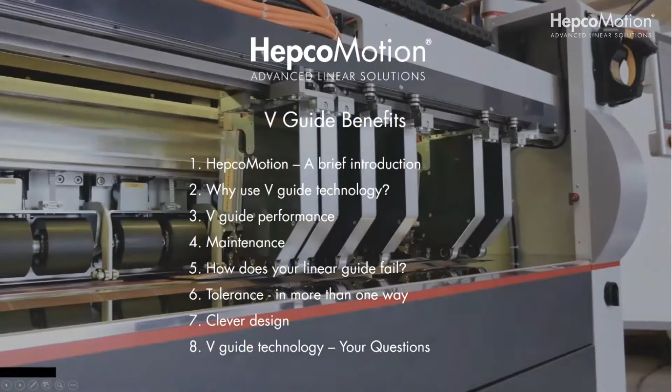Okay, so today we're going to look at firstly Hepco Motion, who we are, what we do, and where we are as well, importantly. And V-Guide technology, it's something you may be familiar with, maybe not. But so why use it? You know, what are the benefits in V-Guide technology and how will it help your business? And the features surrounding those benefits.

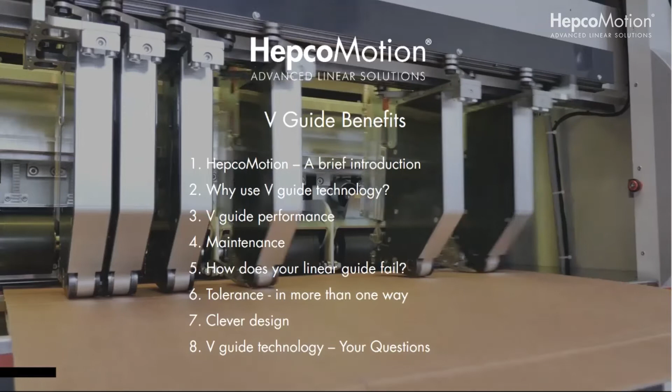So V-Guide performance, maintenance, and how does your linear guide fail? What's the failure mode? Tolerance, system tolerance, not just harsh conditions, but also the tolerance to installation. And then clever design, the design options, the flexibility that gives you with your concepts. And then finally, I'm going to open up the floor to your questions.

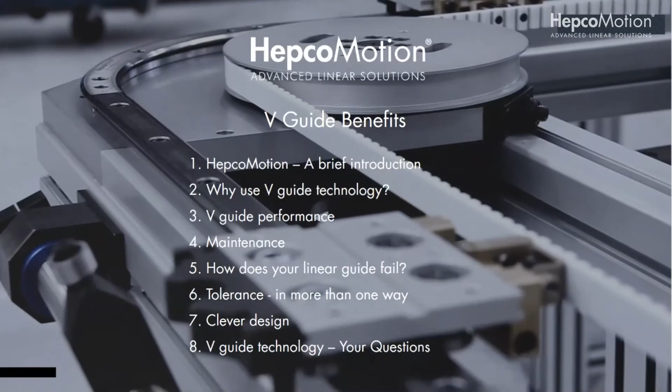So Hepco Motion, what do we do? So predominantly linear motion components. We're a European manufacturer of linear and circular slide systems. So our product range is extensive with over 45 mechanical motion products in our portfolio. And at the core of our range is V technology, which was pioneered by Hepco Motion over 50 years ago.

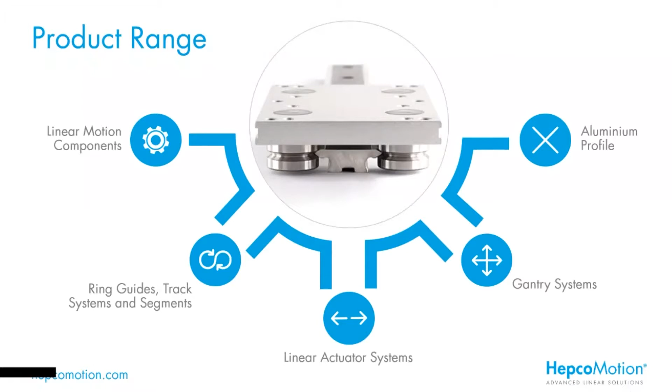We're continuously evolving our technology, and this has led to an ever greater demand for our products. Currently, we supply over 60,000 meters of track per year. Our sales and technical teams are supporting our customers with over 4,000 projects a year. So Hepco Motion is a family-owned and run company with 425 employees working for our customers all over the world. Our manufacturing plants are split over 4 sites, 3 in Europe, 1 in Asia.

Hepco Motion has 3 manufacturing sites in the UK. Tiverton in Devon is the location of our HQ and main manufacturing facility. Our bearing plant is situated in Braintree, Essex. And we also have Hepco Automation, a facility for providing our UK customers with complete turnkey solutions built around our range of motion products. So we have branch offices in the UK, Germany, France, Benelux and Spain, each with our own dedicated team of sales engineers providing direct application support to you and our customers.

In Asia, South Korea, we have another manufacturing facility supporting many of the technology-driven industries in this part of the world, so namely electronics, automotive, and EV manufacture, to name but a few. We also have dedicated teams of field sales engineers working from our offices in South Korea, China, and India. So as the demand for Hepco's industry-leading technology has grown across the globe, we've expanded our reach with trusted, respected partner companies, meaning that our products are available now in over 48 countries.

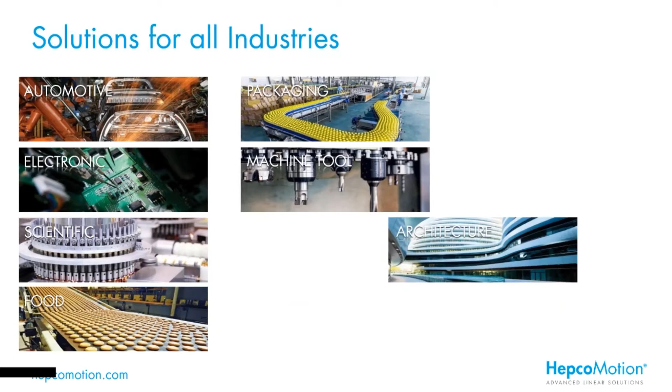So manufacturing, science and technology are core to virtually all industries. And where there is a need for motion, there's the opportunity for Hepco's products to provide solutions. Probably easier to tell you the industries we're not involved in rather than those we are. But a few key examples of where our products are used include packaging, food production, electronics, and pharmaceutical.

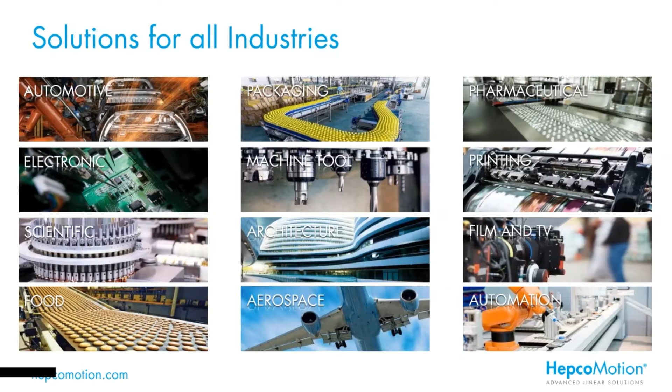So why will Hepco's V-Guide technology save you time and money? After all, that's the big hook, the big question. And of course, we recognize there are other technologies out there, some that even look very similar. So I'm going to run through the strengths of our V-Guide technology and the quality that really sets us apart.

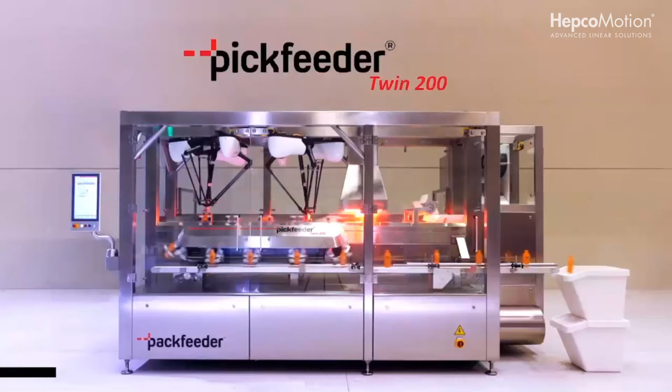So we're going to consider 3 key benefits that surround our V-Guide technology. And the first one we're going to look at is productivity. How will a V system improve your throughput? So we're going to focus on three main features, the first of which is speed. So speed, clearly, it's fundamental to throughput. Goes without saying, the faster you can get your product through a line, the more product you're going to produce.

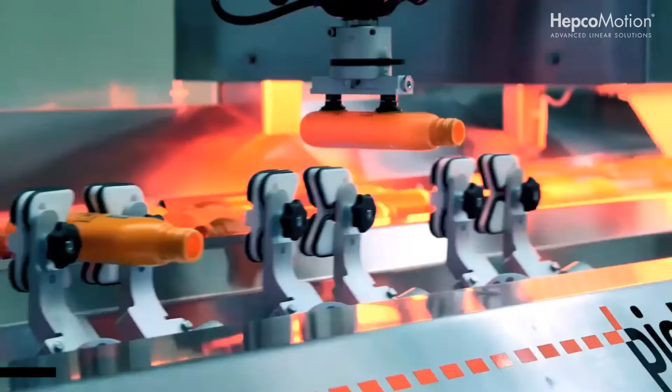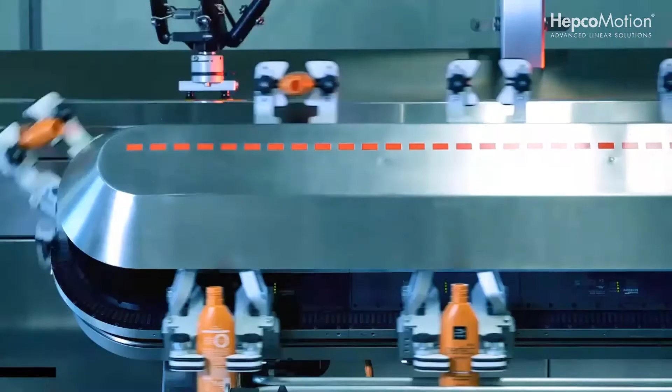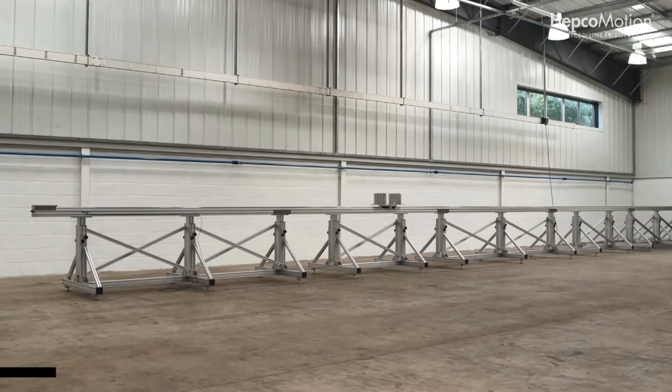So what are we talking about in raw numbers? Well, a V system is capable of speeds in excess of 10 meters per second, or in other terms, 36 kilometers per hour. So it's not hanging around. So combined with acceleration figures of 3 to 4 Gs, we're looking at a very dynamic system capable of exceeding alternative technologies.

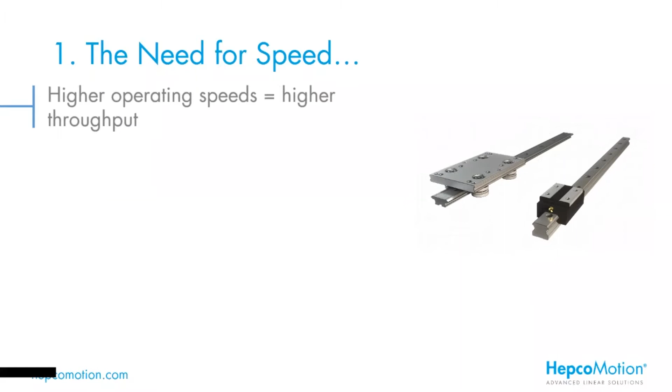So higher speeds clearly equals a higher throughput, which means increased productivity. A V-Guide system is capable of around 10 meters per second. Recirculating technology, such as ball rails or ball bushings, are typically limited to 3 or 4 meters per second.

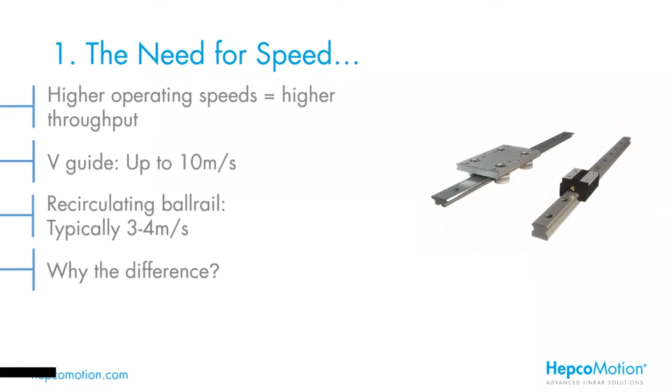And why is there this big difference? Okay, so it's all going to get a bit sciencey now, but please bear with me. This is fundamentally down to Newton's second law of motion: force equals mass times acceleration. So recirculating bearing designs experience a high degree of acceleration change between the load bearing track and the return track, as it goes around that loop to return.

Ultimately, this causes very high forces to be applied to the end caps of the bearing, which are responsible for guiding the balls into that return track. So the combination of the high force and end cap material really limits the rate at which the bearing block or bush can travel. Conversely, a V bearing system has a uniform acceleration due to its circular design. The balls are captivated between highly durable, hardened steel inner and outer raceways.

To put it in relatable terms, think about driving your car around a sharp hairpin bend as opposed to a long sweeping bend. Think of the forces you experience in both those scenarios. That's much the same as what's happening to the balls within the innards of those bearings.

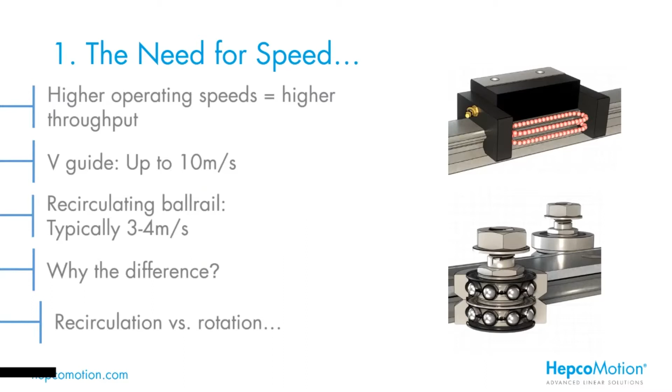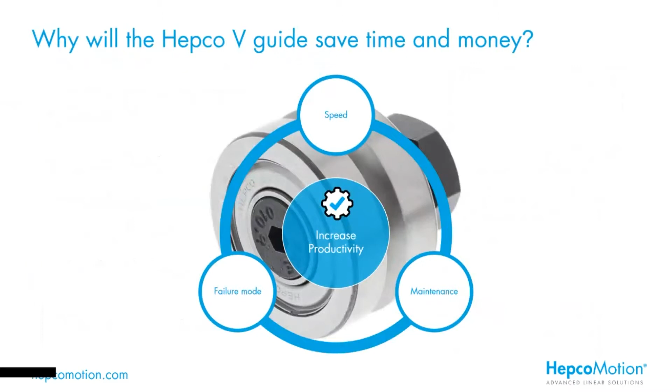So looking back at our key benefit of increased productivity, we can see that speed is fundamental to achieving this, and V technology really offers a significant advantage in this area. Indeed, we're seeing our products used extensively with linear motors for exactly this reason. And the next feature we're going to look at surrounding productivity is maintenance.

One of the key features of Hepco's V-Guide linear system is the facility to adjust the eccentric bearings. This means that after many thousands of kilometers of travel, when a small amount of play develops in the slide system, it can effectively be reset back to its original factory preload. This is a feature that's not possible with alternative recirculating technology. If you get play in a ball rail system, then effectively that has to be taken out and thrown away. So the key message: readjust, don't throw away.

The eccentric journals give that carriage adjustment, and typically you may be able to readjust that system 2, 3, or even 4 times during its overall system life. The recirculating linear guides require a complete replacement. You can't just change the block when a bit of play comes in, because invariably the wear has occurred to both the internal runners on the block and the running raceways on the rail as well. There's no means of adjustment.

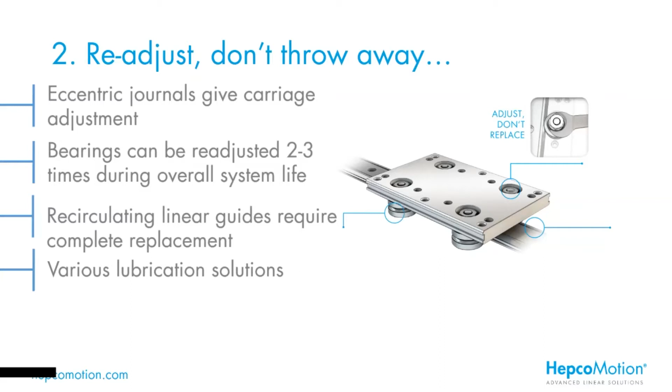The Hepco V system incorporates various lubrication solutions. We've got cap seals which fit over the bearings and allow the bearing to be charged with grease, giving you about 1,000 kilometers of running before you touch it again, and lubricator devices which run directly on the slides. But if you want a really fit and forget solution, we can offer a bleed lubrication option, which ports directly into the slide and can be piped up to an automated dosing system. So really you never have to touch it.

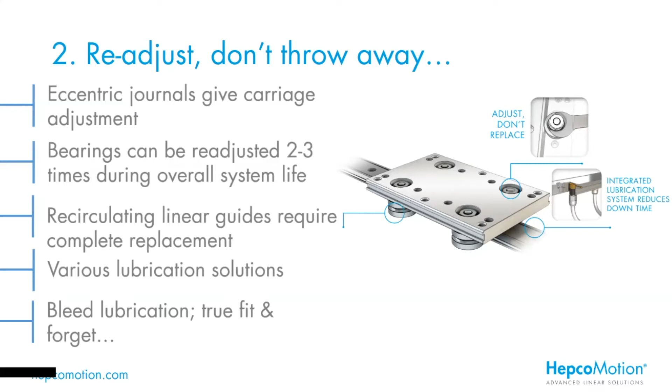So V-Guide maintenance means that the system can be adjusted as opposed to complete replacement. And undoubtedly the adjustment process takes far less time, meaning the machine is operational for a higher percentage of time, which ultimately means higher productivity. Moving further down the line and looking at end-of-life scenarios, you've got to consider the failure mode and how it is going to affect your productivity.

I think you'll all agree that the worst case scenario is where everything literally comes to a grinding halt, possibly with some quite spectacular effects. So what is catastrophic failure? It's a sudden and total failure that's irrecoverable. Sounds pretty bad. What effect does this have on your production line? Ask yourself that question.

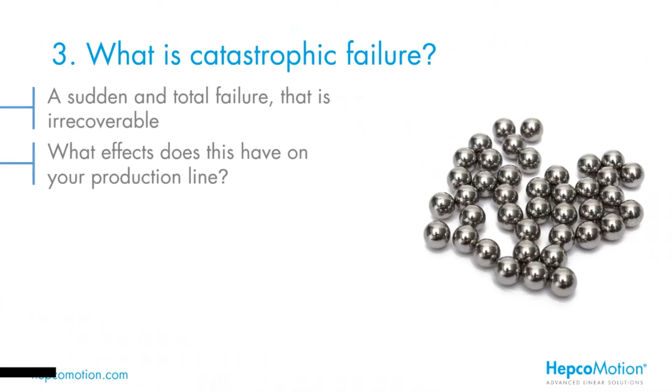So why does recirculating technology have this limitation? Well, as we looked at with speed, the balls are running around inside the end cap. The end cap material is generally a plastic type of material, and as the system comes to its end of life, all of the stress that's gone through that end cap causes wear and ultimately failure of this end cap, resulting either in the balls pushing through the end cap or the end cap coming away completely.

Once that end cap is gone, there's nothing to retain those balls. So the balls come out the end of the block, and invariably you've got metal on the rail, and it literally will not move. Once those balls have gone, there's no bearing technology going on anymore.

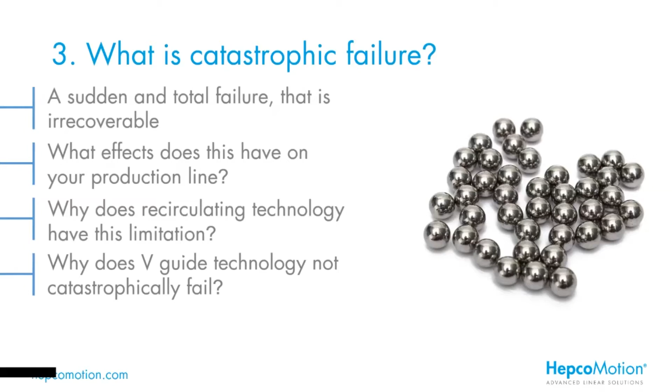So, conversely, why doesn't the V-guide technology fail in the same way? So we've looked at the construction of the V-bearing, and we've mentioned the fact that the balls are captivated between those hardened raceways, an inner and an outer raceway. The bearing is sealed for life, okay? This isn't the running surface.

So when some wear builds into the system, you will get a bit of play in the bearing. It'll be noticeable. The carriage will start to move and you can feel it on the bearing, and quite often you'll get noise as well. So you've got a warning, and this is a gradual process. It happens over a long period of time. So you don't get that sudden going from working to not working. You've got a really long period where this wear is taking place. So it's very much a gentler process.

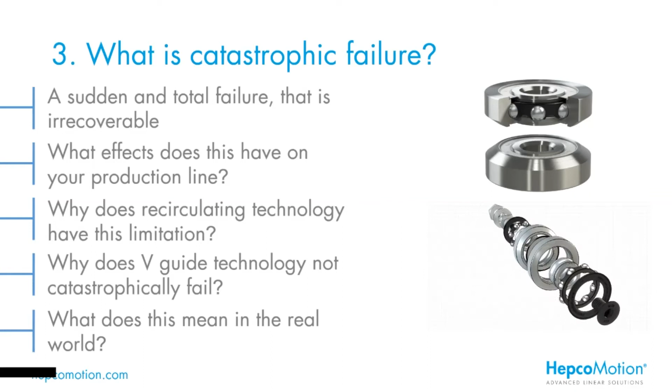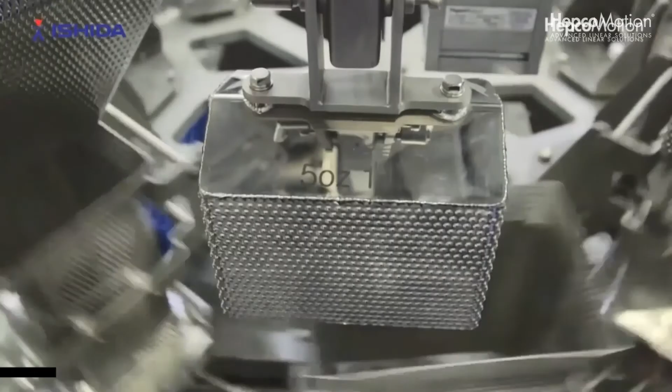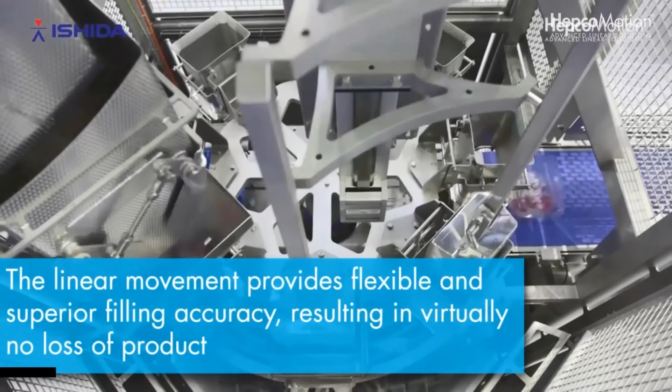And we've got to consider, what does this mean in the real world? So let's take this application for an example. It's a food packaging process, and for this particular application, it's using a DLS4, which is using a V-guide system. But say it was using a recirculating ball rail. So it completes a stroke of 300 millimeters in 1/4 of a second. This is operating 16 hours a day, 7 days a week. So the output is one product every 1.2 seconds, which equals 3,000 parts an hour.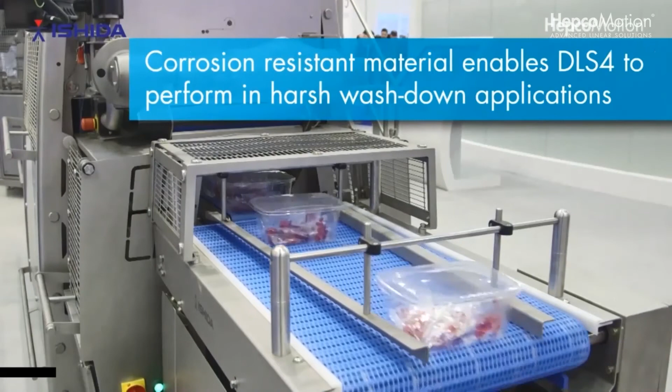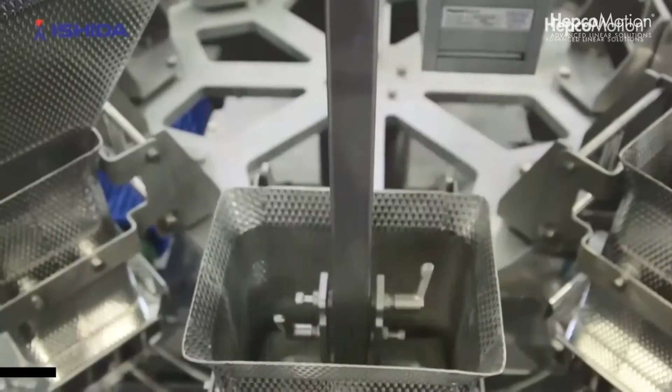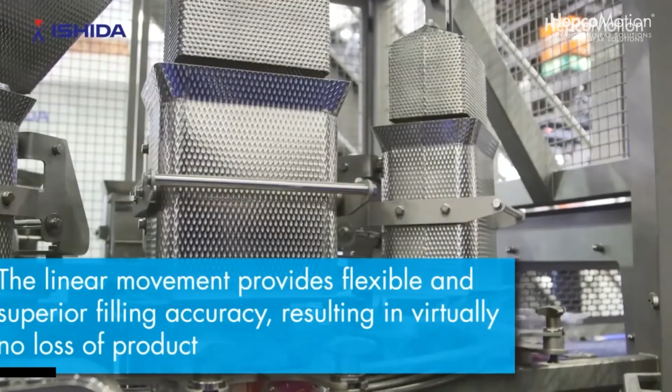And in this particular application, the customer is using a Hepco V-Guide system. So it really allows them to run quite literally millions of cycles with the confidence that this system will not catastrophically fail. They'll get those warnings. They might get a bit of play in the system, or it might get a bit noisy. But ultimately, it's not going to suddenly grind to a halt with a sudden bang.

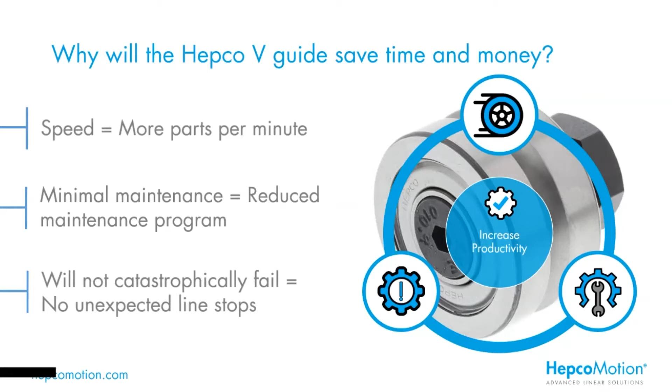So to summarize the features around the key benefit of productivity, speed clearly means more parts per minute. The minimal maintenance means a reduced maintenance program. It means your machine is running for longer, therefore it's outputting more product. The fact that it will not catastrophically fail means you've got no unexpected surprises. And you don't have to build in as frequent planned preventative maintenance. Again, this means the machine is running for longer and it's producing more.

Okay, so now that we've looked at the key features of increased productivity, we're going to look at the next significant benefit, which is the cost saving that a V-Guide solution can bring to an application. So we've already touched on maintenance, and of course this feature has a crossover to the cost it can save during the life cycle of the machine. The adjustability of the eccentric bearings allows for repeated resetting as opposed to a replacement. Being able to adjust means that money is saved not only on the material cost of the components, but also the cost associated with downtime and maintenance hours.

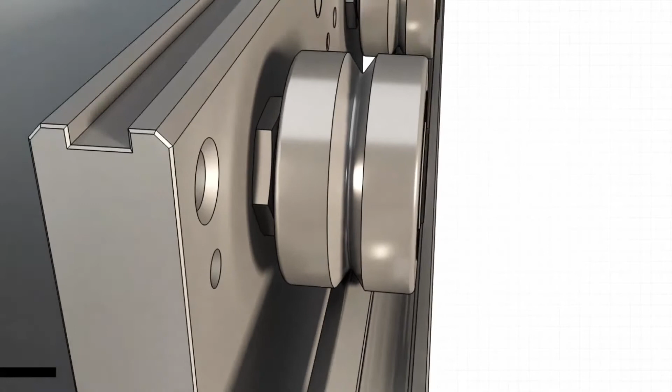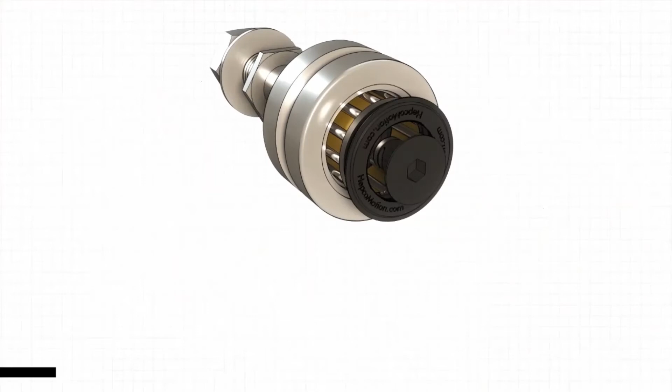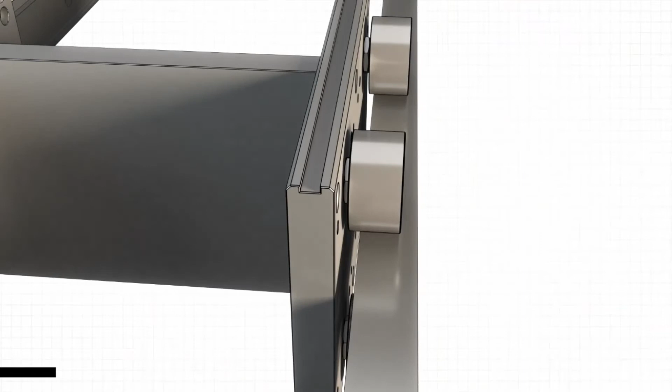And significantly, another feature that saves money is the ease of installation. A V system, by its very nature, is very tolerant. The bearings have a small axial float within them, and it allows for V systems to be mounted in parallel. And because you've got this small amount of tolerance, it won't bind and fight against each other and cause additional load. But beyond this, we've got additional options which allow for greater tolerances, including floating bearings and flat tracks. This does not require machining mounting surfaces. So these options really allow for installation even with welded fabrication tolerances, which, as we all appreciate, are quite wide.

So the compliance is integral to the design. If you're running on a slightly imperfect surface, the 4 points of contact of the 4 bearings will allow for slight misdemeanors in your mounting surface. Pretty much most surfaces are okay for a V-Guide system. So you could take a length of steel box section, for instance. And you don't need to specially prepare the surface. You don't need to machine it flat because there's enough tolerance within the bearing system.

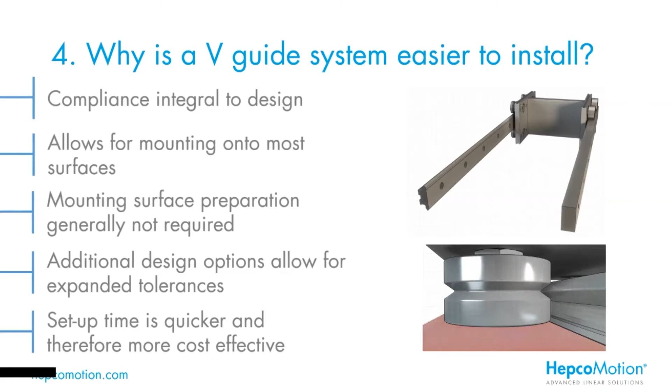The additional design options really allow for expanded tolerances. And ultimately, this means that your setup time is quicker and therefore more cost effective. So with built-in compliance and options that extend this capability further, time and therefore money is saved, not only on the installation, but also design. And it's so easy to overlook design costs, but literally why spend money on reinventing the wheel?

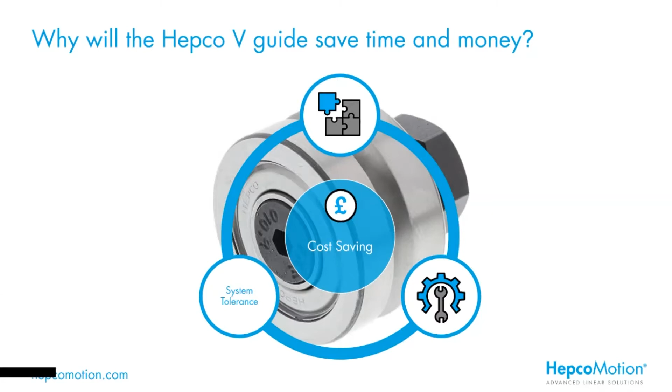So moving on to system tolerance. And we really do love a challenge. And this is one area where the V system excels above all other technologies. Sure, we can do nice and easy, clean and dry environments. But when the going gets tough, the V system really steps up. Throw what you will at a V system: dust, swarf, wash down operations, even glass. There really is no better solution for keeping things moving in challenging environments.

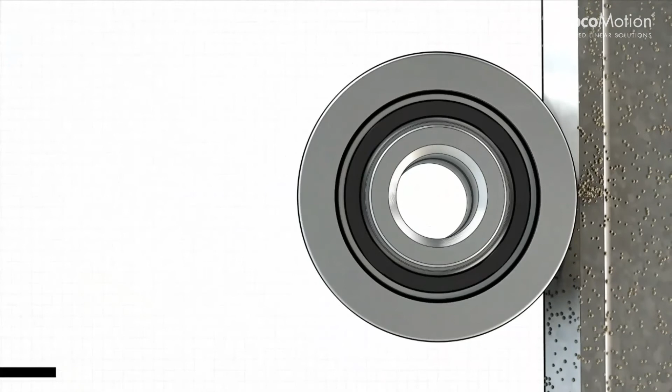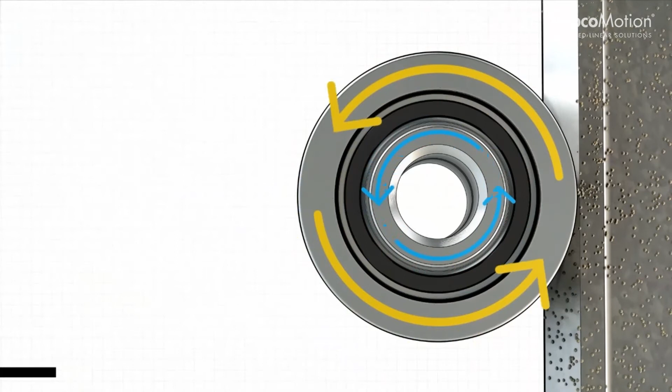Another inherent feature in V-Guide systems is its self-cleaning ability. The difference in diameter between the inner and outer of the V profile in the bearing results in a peripheral speed that increases as you go towards the outer edge of the V. The effect of this speed differential pushes the dirt and dust to the outside edge of the bearing, effectively wiping the flanks of the V clean as the bearing passes over the slide.

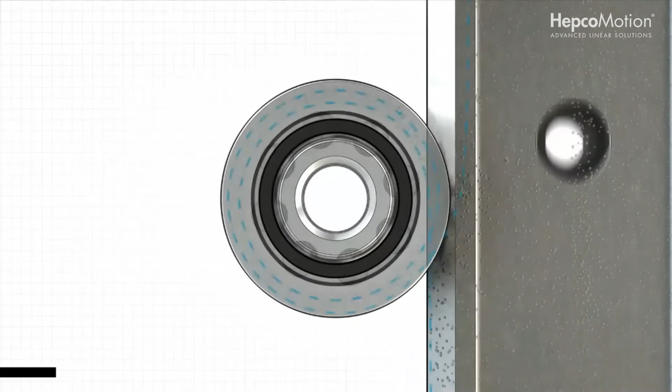Put in another example, think about sitting in your car in a hailstorm. You've got your windscreen wipers going, and it will push those hailstones towards the outer edge of the wiper, where you've got a greater amount of speed. Much the same sort of manner or principle. I may have used a bit of artistic license there, but you get my drift.

So let's look at a real life application. This one is using Hepco's GV3 V system for linear guidance of the reed on a carpet weaving machine. And clearly this is a dirty environment with plenty of dust and flock in the atmosphere. In this instance, the V bearings are housed in cap seal devices, which provide lubrication to the system and also aid with the wiping function. As a result, this particular application has been operating for over 10 years without a single breakdown of the linear guide system. Pretty impressive.

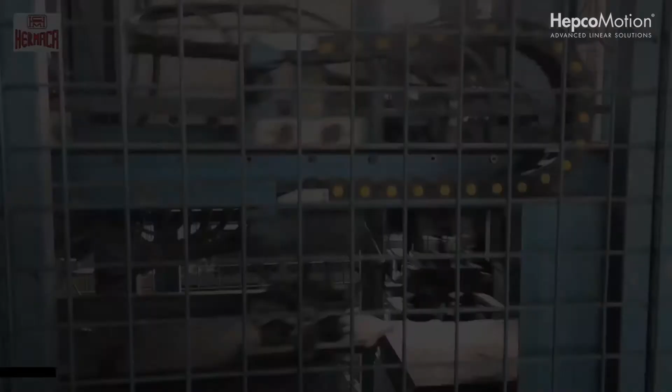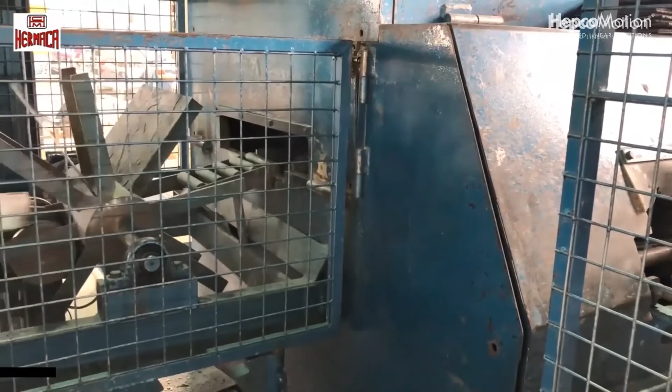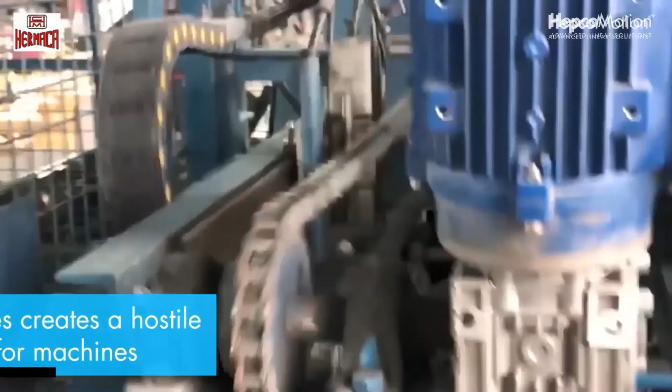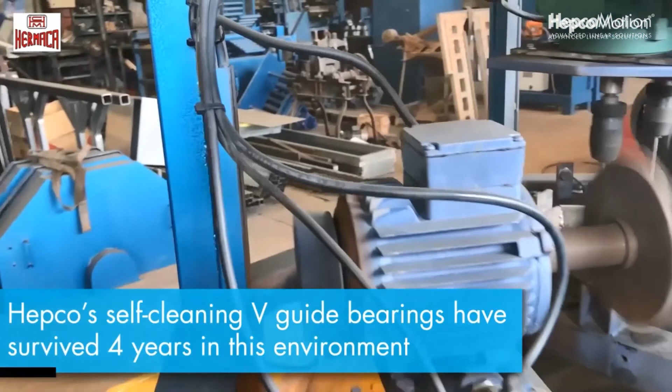So we've established a bit of fluff is no problem, but let's step things up a bit. How about slate processing? Now, the cutting and grinding of slate is probably as harsh as it gets. It's a fine abrasive dust that literally gets everywhere. And indeed, this system was originally designed with recirculating linear guides. However, due to the aggressive environment, these guides were only lasting about 4 months before they needed changing. The system was refitted with Hepco's GV3 V guide systems, and it now gives over 4 years of life in what is clearly a very challenging environment.

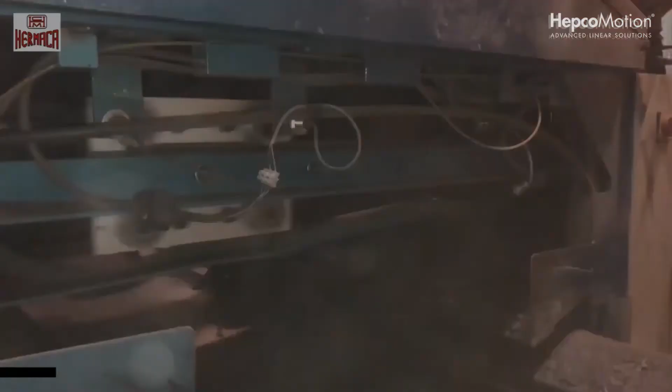So in this instance, the application runs without lubrication on the slides, and this prevents the abrasive dust mixing with the grease to form a damaging grinding paste. And again, this is really a key differentiator. In the right application, dry running is possible. However, we do strongly recommend that you check your application with our technical team first.

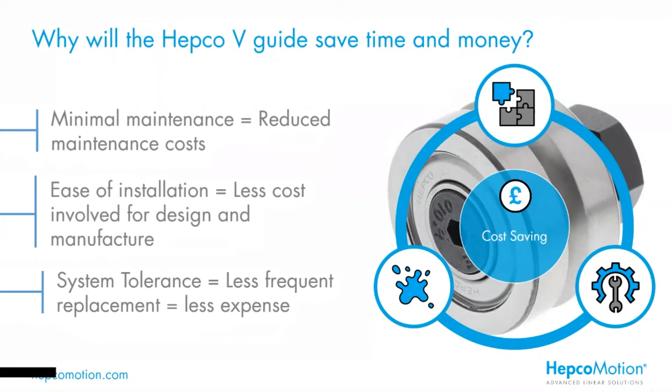So, looking at the key benefit of cost saving, minimal maintenance means reduced maintenance costs. The ease of installation equals less cost involved for design and manufacture and installation, of course. And the system tolerance to harsh conditions means that you've got less frequent replacement and therefore less expense.

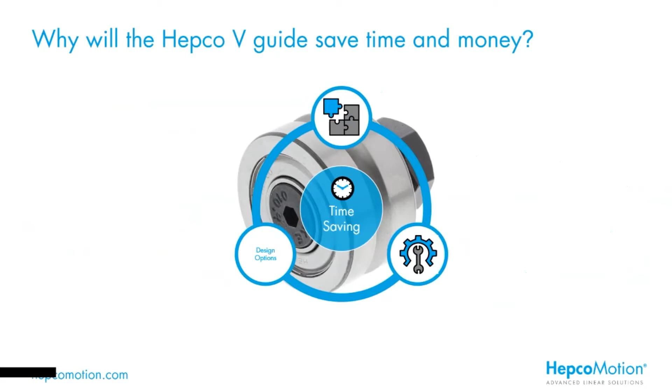So cost saving, time saving, they're understandably benefits that really go hand in hand in many cases and share some common features. Reduced maintenance equals less time spent by your engineers on preventative or corrective maintenance. The ease of installation clearly saves time for both the design and the assembly processes. But additionally, the design options available can provide significant time savings. So we'll look at those next.

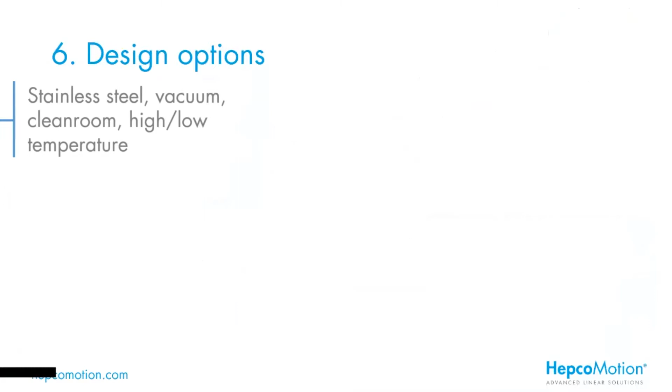The core V-Guide principle runs through many of our products and provides guidance for applications ranging from shuttling microchips into vacuum chambers to the pick and place of heavy racks of bread. So if you've got a specific application that is based around product handling, assembly, processing, pretty much any sort of motion, there will invariably be a V-Guide system that will suit your needs. And our strength as a manufacturer allows us to adapt to the needs of our customers, and we've developed many innovative solutions to solve our customers' problems.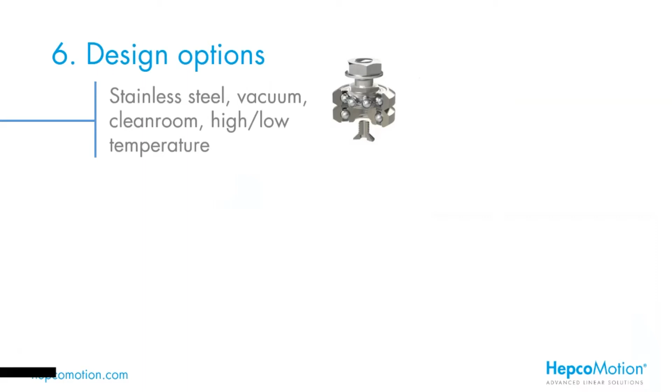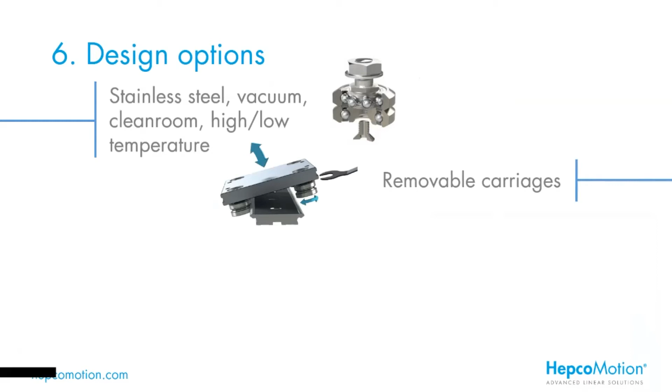For instance, special all stainless steel bearings suited to clean room and extreme temperature applications. Removable carriages that allow vertical removal from the slide as opposed to having to run it off the end. This is fundamentally important if you have linear guides that are running between machine bulkheads. It can save you all the time of removing the end of a machine to do your maintenance. We've got integral rack drives mounted to V-slides, taking away the need to design, install and align relative to the guide system.

And of course, our ring and track combinations offer unparalleled flexibility in machine design. Why reciprocate when maybe you can go in a continuous motion using one of Hepco's many designs of driven and undriven track systems?

So another key benefit of being a world-class manufacturer is that we're able to offer extensive customization to our products. Customized carriage plates to suit your tooling requirements, special surface finishes, non-standard mounting holes, non-catalog ring diameters, and so on. We get asked for different things all the time, but it can really save you time in your design and installation.

But additionally, we can also offer bespoke mechanical system designs. So much of the legwork is taken out of realizing your concepts, so we can put together multiple parts of our product range together as a full mechanical system.

So we've looked at the fact that design flexibility really can save you time during your machine concept and design to minimize the additional drive elements or simply reduce the time needed to access critical components for maintenance or line changes.

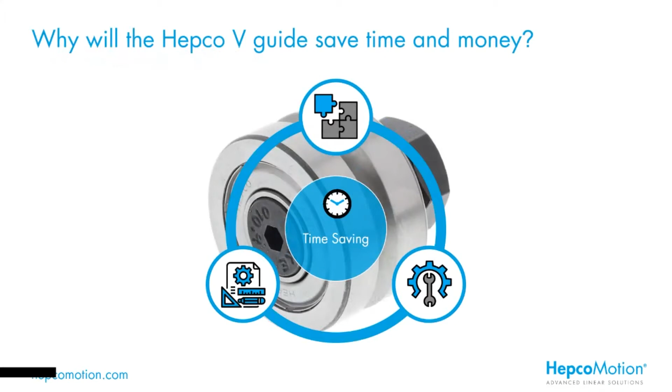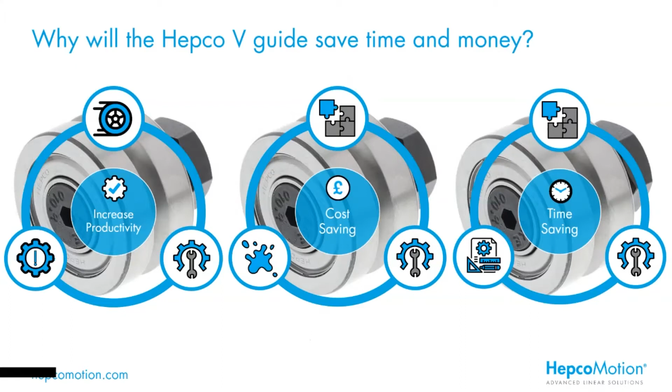So there we have it. 3 key reasons why Hepco's V system can benefit your business by increasing productivity, reducing cost and saving time. But of course, this is really only scratching the surface.

As I've already touched on, Hepco's range is extensive, offering solutions for applications carrying only a few kilograms up to hundreds of kilograms. So looking at the products themselves, GV3 is our core product, offering many different slide specifications and numerous design options from manual locking devices to integral racks. Simple Select is a complementary range providing the quickest ship time of any of our products.

SL2 provides a stainless steel linear V-guide solution suited to applications such as food, pharmaceutical and electronics manufacture. Bishop Wisecarver DualVee and UtiliTrak products offer further design options based around single edge V and channel based technology. Or for high payload applications, Hepco's HDS2 can be assembled, for instance, into multi-axis gantry systems. And we have a varied range of modular driven systems with options on driving methods such as belt or screw.

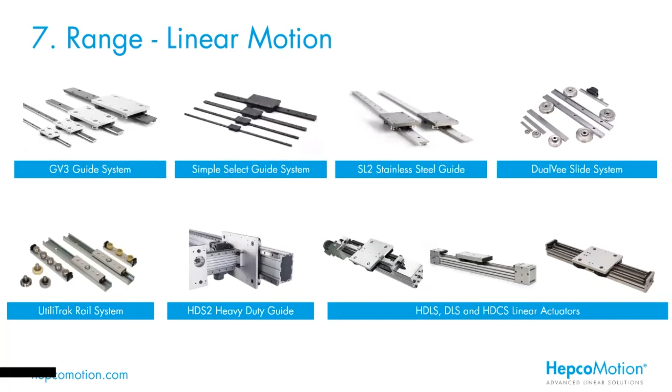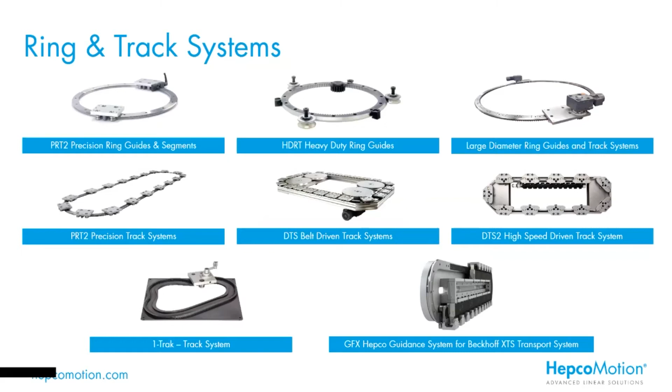And V systems, of course, aren't restricted to just straight lines. Our ring and track systems offer a huge array of options on slides, bearing sizes, and ring diameters. Hepco's patented 1-Trak design has proven its ultimate flexibility, not least in contributing to the cutting-edge GFX track system, an innovative track system that really enhances the mechanical capabilities of Beckhoff's XTS system. Again, we're really only scratching the surface of our ring and track solutions, and we will save this for a future webinar.

So half an hour is really not much time, and we've really only just touched on the potential of the V-guide systems. But here are a few more key points that you may want to consider Hepco's V technology for. So the V-guide design can allow for 6-wheel carriages that can traverse gaps. 100 millimeters of free air is quite feasible, and with at least 4 bearings in contact with the slide, there's no loss of stability. You've always got that preload. Equally, it's very easy to butt tracks together for theoretically limitless lengths.

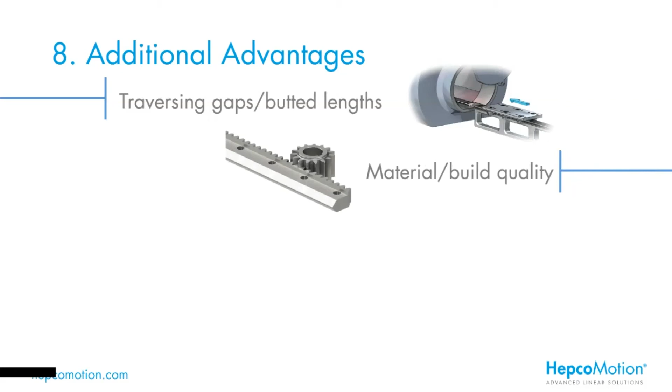And it goes without saying the Hepco product is of the highest quality. We only use premium grade materials, and our hardening processes have been refined to a fine art over the past 50 years. The freedom of configuration has allowed for some truly innovative designs, systems with carriages traversing multiple guides on different levels. So why build out when you can go up? Think of the difference that could make to your

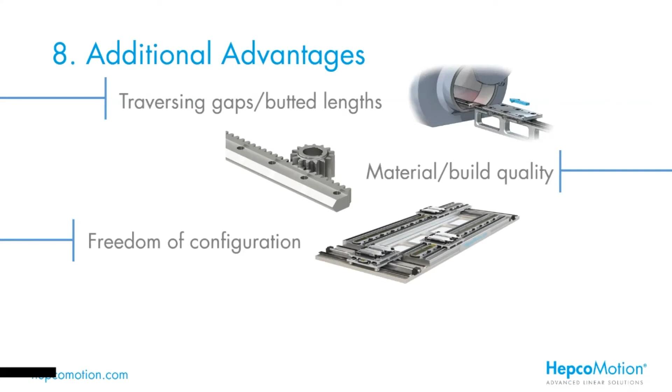valuable factory floor space. And noise is another aspect that can be easily forgotten in machine design. Hepco's low friction V systems are incredibly smooth and quiet. And indeed, one of our claims to fame is being used on the camera gear that captured the impressive panoramic shots in the recent Star Wars movies.

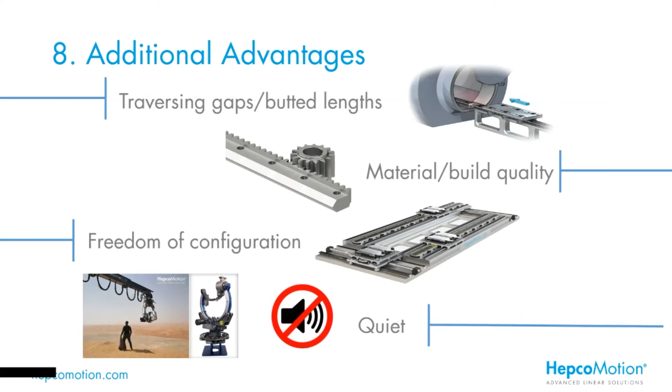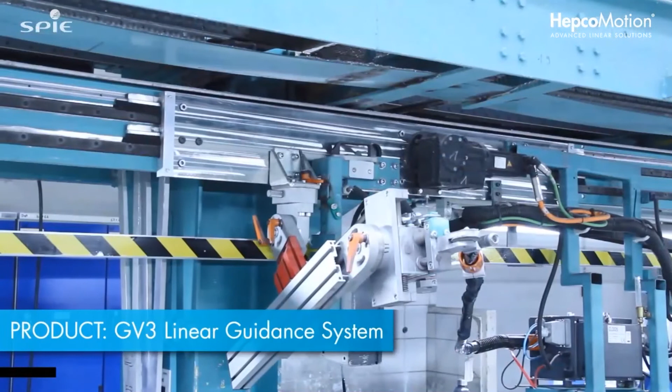So to summarize what I've shown you today, Hepco's V systems are well suited to long, fast and dirty applications. Long butted lengths, integral racks, flexible installation options, removing the need for expensive and fussy setups. So I ask you to please consider all of these points when you're looking at your next project, as the true return on investment is rarely at face value.

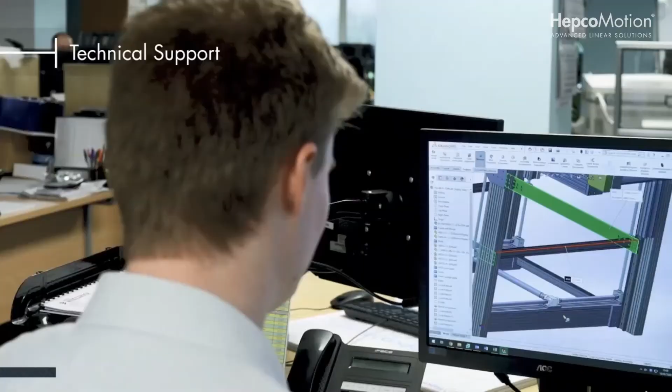So we had a question from Sammy in Spain, asking about water and paint splashing on the V's of a DLS system. So the V system, as we looked at earlier in the presentation, is extremely good in dirty, harsh conditions. If there's water involved, then you'll need to use a stainless steel guide. That's a standard option within the DLS range.

As for paint getting on the system, what you will find is that the V bearing and the wiping action will actually clean that paint on the running surfaces. Now, depending on the amount of paint that you've got going on there, you may find that will mix and discolor your grease, but it won't cause a problem. So certainly that's an application that we've done before.

Prikash asks whether a similar series of Hepco can be used in furnace environments, so for an auto ladle or auto pouring of molten metal, and what kind of effect the heat will have on the bearings. Okay, that's a very good question. Heat is an area that's very challenging.